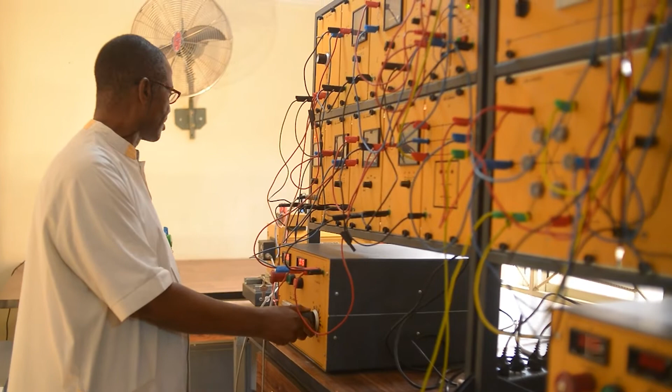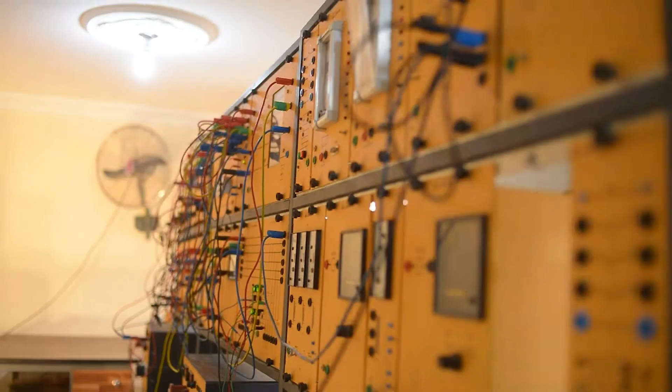At PEEMADI, there is a power simulation laboratory workshop housing a module of a power generating station produced by the institute. Engineer Mohammed Zaki Salihu tells us more. Welcome to the Power Simulation Lab. Here we have a model of a generating station like what we have in Kainji and other generating stations in Nigeria.

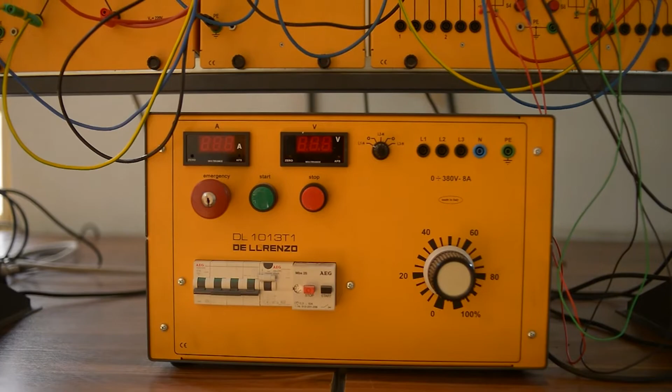In this system, we have a system of bringing two voltages together. For example, if you need higher power and you have only one generating station, but you're able to raise another generator, maybe an independent generator, then you need to synchronize these voltages so that you have adequate power as per requisite.

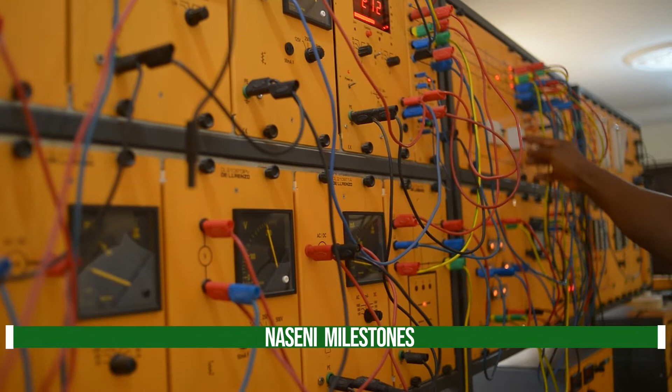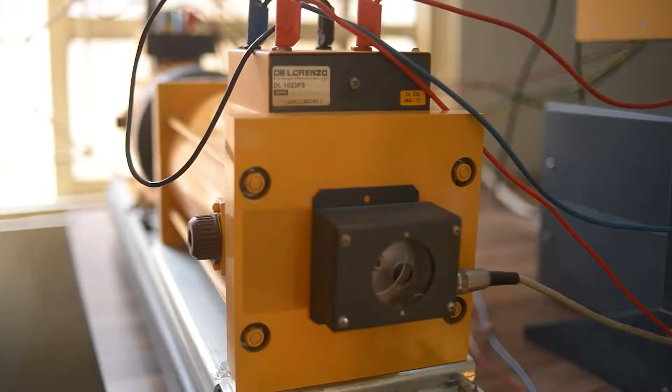Before you do that, you need to make sure your voltages are the same, the phases of the voltages are the same, and the frequency is the same. After you've attained this phenomenon, then you can send your voltage to the bus bar. From the bus bar, it will be transmitted to the utility, where you now have it at your domestic disposal for users. This is a synchronizing machine.

It's trying to bring two generating stations together. At this point, you cannot synchronize them, but you need to allow it to get to a limit where it is going off and on. But if you check the voltage is too high, you have to reduce the voltage to the nominal voltage.

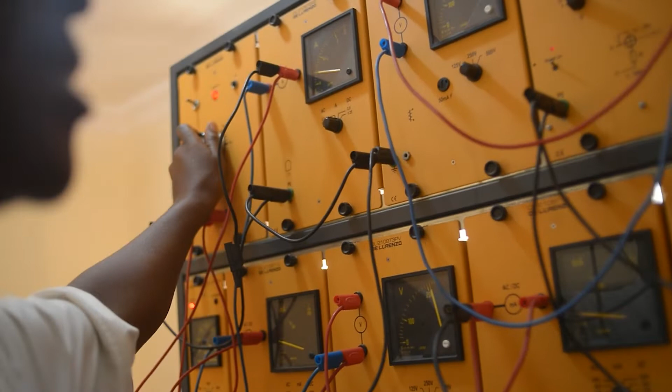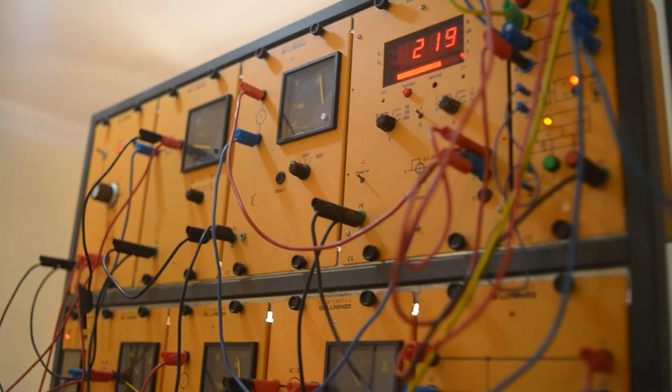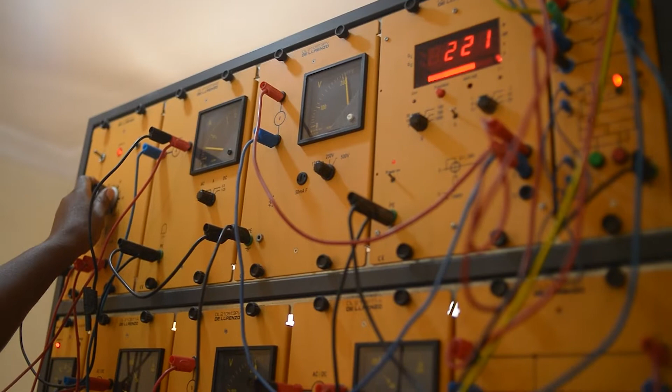Now at this point, we have the nominal voltage, but our synchronizer speed is still too much, so we have to decrease. These are the adjustments being done at the generating station so that there will be no problem by the time the power is sent to the utility.

PEEMADI is known for electric transformer manufacturing. Some of the trained staff in transformer production are hoping to go into full-blown transformer manufacturing when the expected transformer production plant is established. The core mandate of this institute is to produce power equipment so that Nigeria will be self-reliant in terms of power distribution and transmission, and one of the core mandates of that power equipment is the transformer.

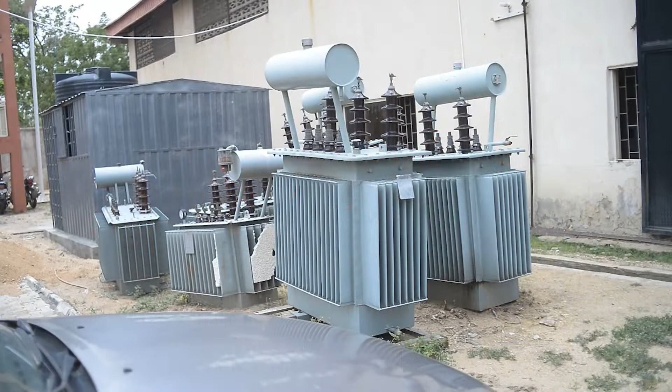We are very versatile in terms of transformers. We have what it takes to produce transformers. We have been trained in China, almost 60 engineers, in the act of manufacturing transformers. Luckily, among those 60 engineers, we have 30 of them in this institute.

While we were in China, we were able to produce almost 9 transformers, which have been deployed to the headquarters now. Right from the design, the lamination, cutting of the assembly, and everything was produced by those 30 engineers. When we returned from China, we now engage in the act of manufacturing transformers based on the basic equipment we have. As you can see there, the engineers are working.

These are the transformers we produced when we returned from China, and we're happy if the transformer manufacturing plant can come into being now. The problem of transformers in Nigeria will no longer be an issue. It's gone forever, because we'll be rolling out a lot of transformers that will solve Nigeria's power problem.

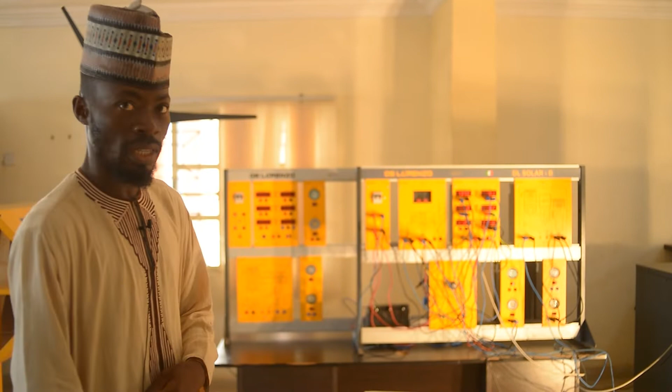This is a renewable energy training section, and Engineer Tajuddin Abdulrahman explains the use of solar and wind renewable energy sources and the staff's capacity in producing such devices. What you are seeing here are renewable energy trainers, the photovoltaic power system, which demonstrates the function and operation of a PV power system. PV means photovoltaic, which means the energy you get from the sun.

What we have here is known as the solar panel. When sunlight falls on this device, the solar panel, it generates what is known as DC voltage. The DC voltage is then converted into AC for domestic use, because most of our domestic appliances run on AC.

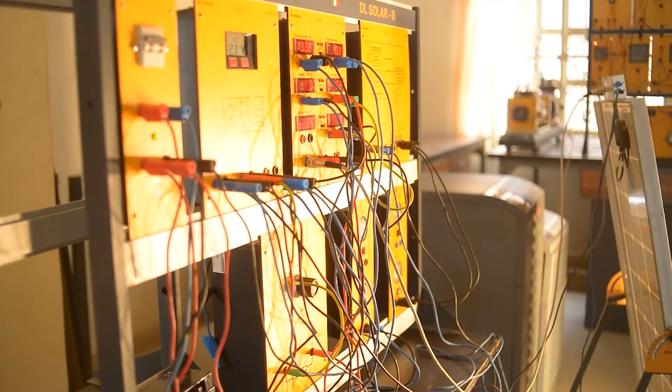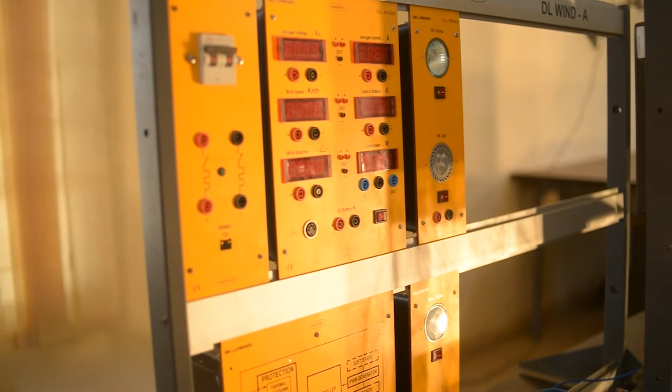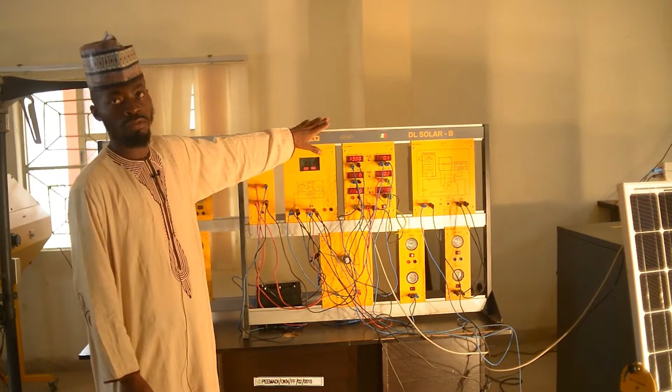Because solar is not available throughout the day, there is a need for us to store the energy gotten in the daytime for use at night. That is what this particular component does, a battery, which is also known as an accumulator. So this is a modular setup of what a solar panel system is all about. Beside it is the wind energy trainer.

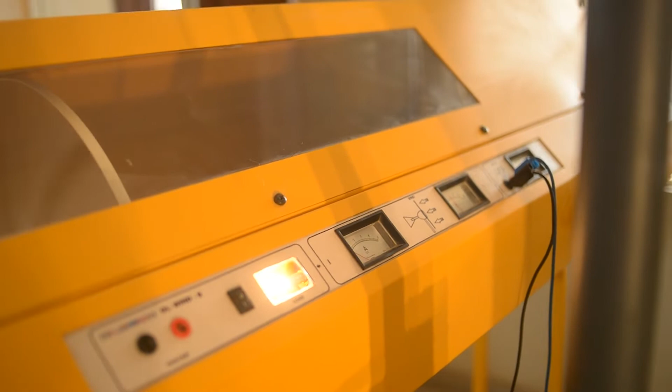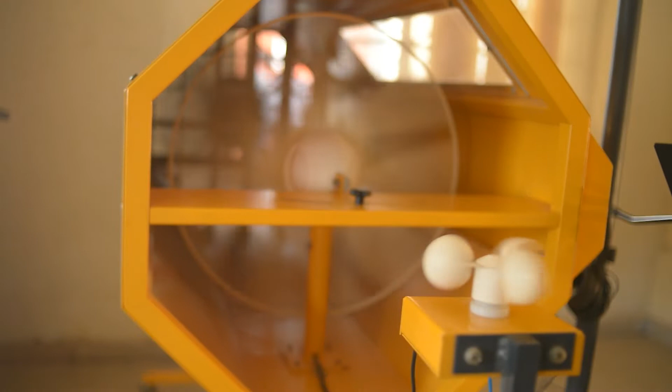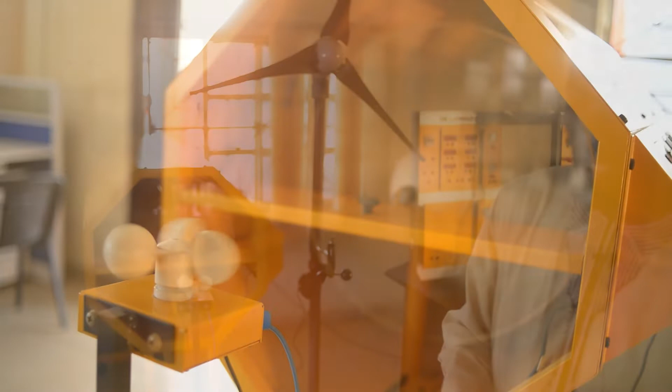It is also a form of renewable energy, which means an energy that can be replenished. There is a fan inside a tunnel which generates the artificial wind. This artificial wind is being converted into wind power with the aid of the turbine inside. This is an anemometer which gives us the value of the wind speed, because the amount of wind energy generated is dependent on the amount of wind speed.

If the wind speed is high, the amount of power will be high. If the wind speed is low, the amount of power that you get from the wind turbine will also be low. So for this outdoor, it is synonymous with what we have here, except that in the case of this outdoor module, you will need a natural wind to blow this turbine to be able to generate power.

When it comes to renewable energy training, we have expertise in that field. Staffs have been trained locally and internationally. Apart from the training, we also look into domestication. So most of these things that you have here, it has been demonstrated, it has been domesticated. We have actually done something like this. In fact, we have made an improvement to what you are seeing here now. Domestically, within us here, we have been able to. So once we acquire any machine, we reverse engineer and we domesticate, which is part of the mandate of NASENI.

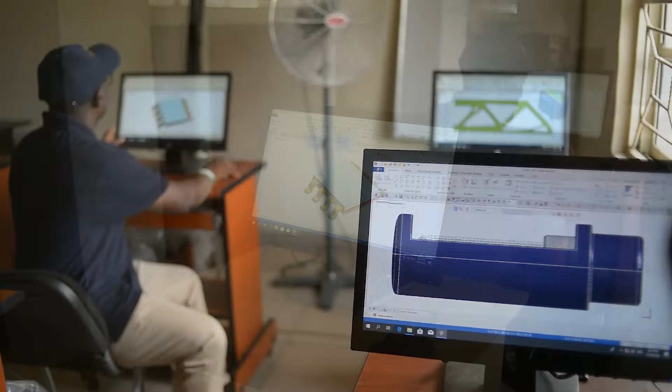Here is the Advanced Manufacturing Technology Laboratory, one of the units under the Research and Development Engineering. Badeyo Oyeyemi is our guide. It is a unit that carries out part of the design work. The drawing aspect of the design is done in this unit before the other aspect of the design is considered. It is a unit that we deal with.

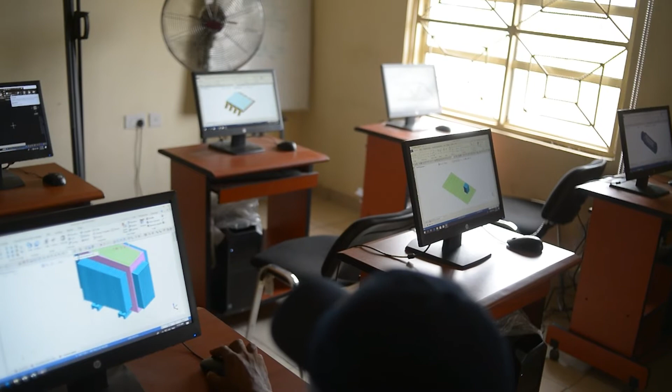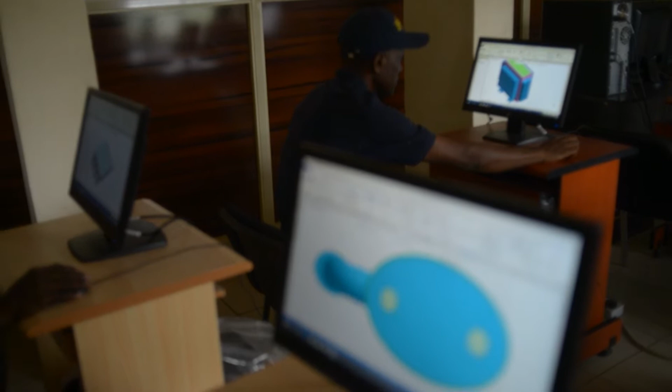We have so many software to carry out our design, which include AutoCAD, the Professional Engineer, which is ProE. We have SolidWorks, and recently we are also trained on the software known as Midas. These are the software we use in this lab to carry out some of our drawings. Some of the products you see around there, we first come here to carry out the drawing aspect of it.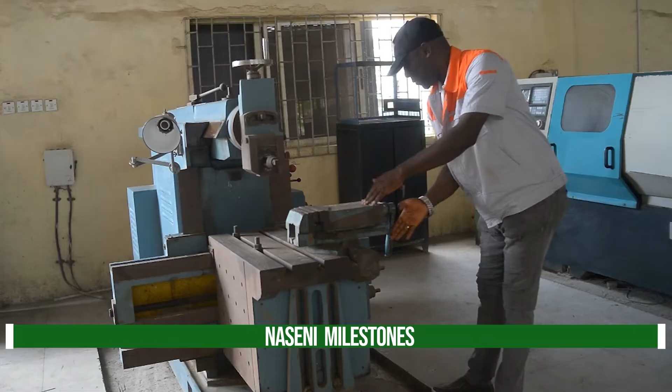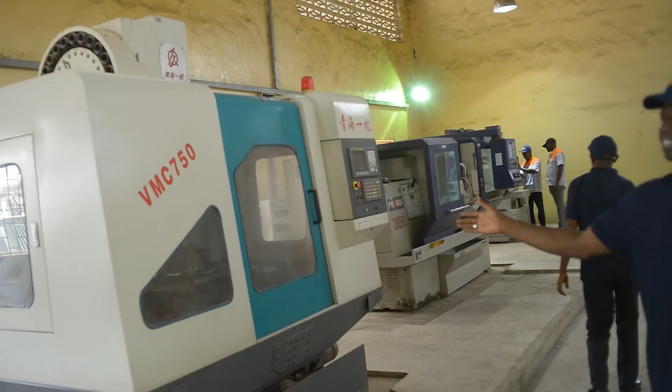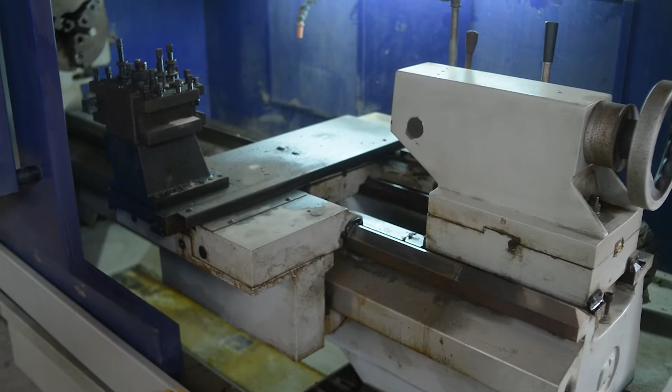Advanced manufacturing is the use of innovative technology to improve products or processes, with relevant technology described as advanced, innovative, or cutting edge. At PEEMADI, there are specific machines for advanced manufacturing technology. They include shaping machines, bent plate, CNC, and other numerically controlled machines. The machines are used in drilling, turning, and facing, and can also be used for mass production of items. The staff of PEEMADI are well trained in the operation of these machines and can produce a variety of items according to specifications.

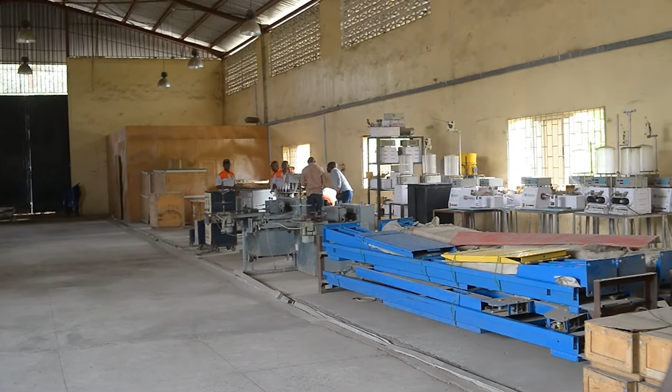We produce 2060 CNC. We use it for turning, for drilling, for facing to do the work. You can see the operation going on. The tool is there, this is the tool post. First we do what is called homing, the homing of the machine to reference the machine. After the referencing, they talk about the spindle. You have to make the spindle work while the tool is there, and you begin to move. You now move the tool post towards the workpiece so that the operation can be carried out. That is how the machine works.

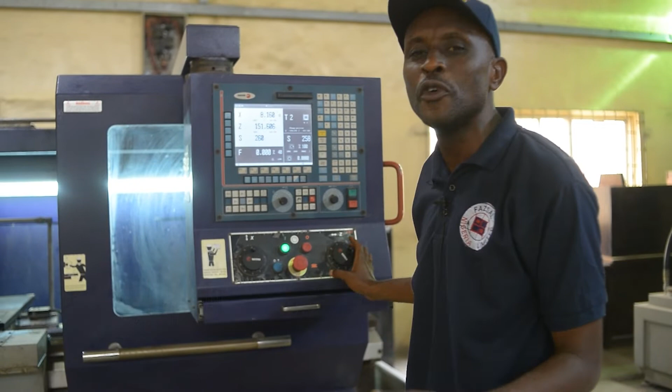It's a very fast means of machining parts compared to the conventional lathe machine, the one we use by hand. So this one is faster, is accurate, its efficiency. In fact, its efficiency is even very close to 80%.

What we have just watched is a clear indication that the competencies of Nigerians in many aspects of homegrown technology is not in doubt. But the challenge is in the adoption of these technologies in order to grow sustainable industrialization for national development. To speak on the imperativeness of PEEMADI in the power sector and efforts by NASENI towards capacity building, here is Professor Mohammed Haruna, Executive Vice Chairman of NASENI.

Power Equipment and Electrical Machinery Development Institute, that is PEEMADI, in Okene, Kogi State, is one of the institutes established by NASENI. The institute was established to cater for the needs of the power sector: important components necessary for a successful power industry, machinery, equipment, switch gears, and even appliances like electric motors, electric generators, transformers. The founding fathers of NASENI have specifically listed intervention in the power sector as part of the mandate of NASENI, and dedicated mono-mandate institutions be created for that purpose.

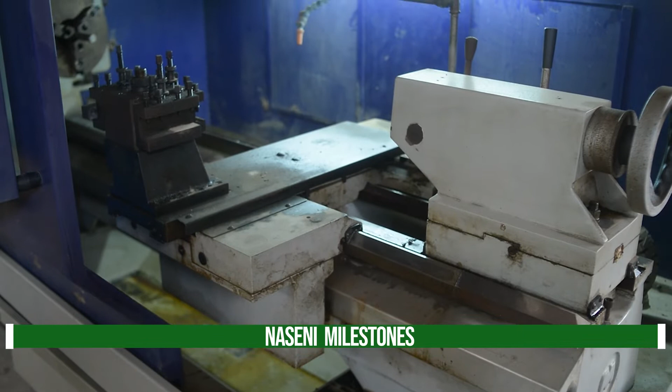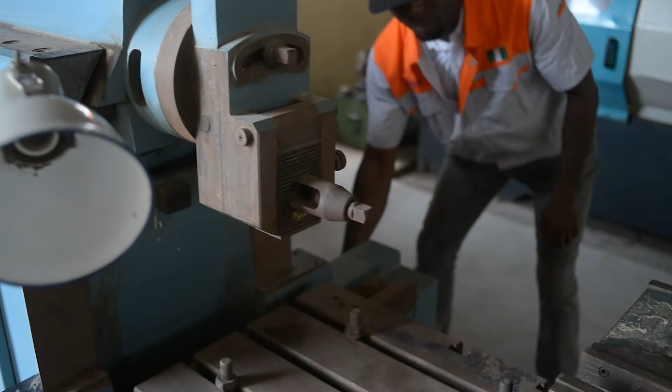So in order to install those CNC machines for NASENI sister institutions, we needed those dedicated transformers. We were given that task suddenly, within 3 months, to come out with repeating transformers, not customized but regular ones that will meet requirements. It is 3-phase, at 415 volts. We were able to do that within a short time.

So anything we wanted to fabricate, we used the Ajaokuta workshop. Despite the non-performance of the factory, we were able to get leasing from the administrators to go there. And within 1 year, thanks to the support we got, we were able to establish a temporary site.

We even acquired a gigantic place as a permanent site, with 47 housing estates inside, road networks, and other workshops, because it used to be the camp and workshop of Dumez, one of the contractors that constructed facilities at Ajaokuta Steel. It is a very befitting and unique location that will cater for all the needs of the power equipment.

And then we got bright young men who were interested, and we sent them to various places across the world in 2010, 2011 up to 2012. We went to Belarus for training, some went to Russia, some to South Africa, some to Indonesia, some to Italy. In fact, 2 different teams went to Italy.

That is where they learned the ability to produce training equipment and solar simulators, making it easier to learn solar technology. The knowledge they acquired there helped us greatly in fast-tracking the completion of our first solar panel in Karshi, and served as the foundation building block for subsequent training.

We are giving people training in the area of solar installation, repairs and maintenance, and even development of equipment such as solar generators and the customized unique inverters made by NASENI.

It is the blueprint I developed from PIMADI to do transformers, high voltage, and solar cells that I offered to my boss, Professor Adeoye of blessed memory, who bought the idea and loved it, but there were no resources. So when God in his ultimate mercy appointed me to this position, I continued pursuing that, not knowing where I would get resources across the world.

And today this vision has become a reality with the approval of the government of President Muhammadu Buhari.

Next, to speak on PIMADI's giant strides in transformer development and production of a high voltage laboratory for testing of power equipment is the Managing Director of PIMADI, Engineer Adaja.

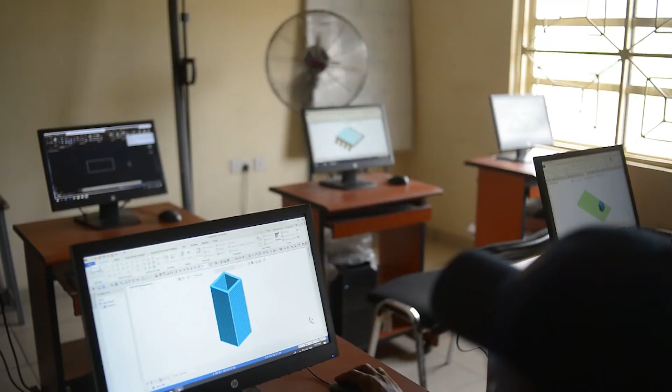Actually, we research into new products. Apart from researching into a new product, we carry out reverse engineering of existing equipment, then reproduce it, and introduce some new ideas into them to perform better than the original.

PIMADI is set to impact more on the power sector of the country. Especially, we are developing a transformer. Hardly will you see any company in Nigeria building a transformer—most transformer companies only do assembly. Our own goal is to build transformers from scratch and make them available in Nigeria.

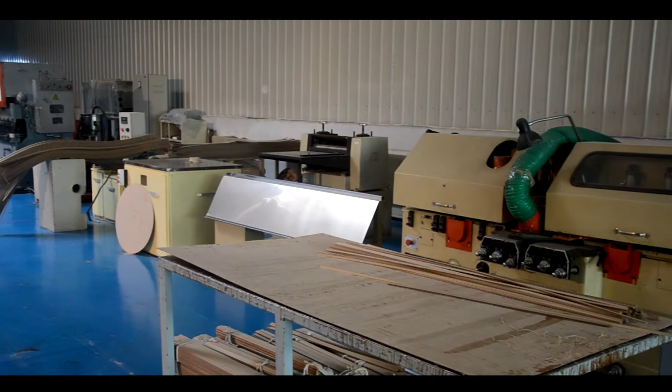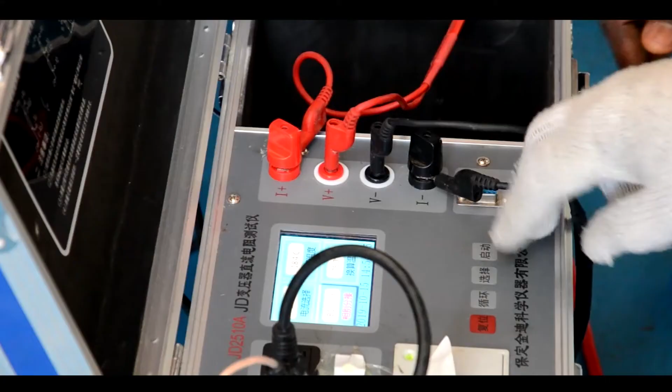We are also setting up our high voltage laboratory, where most of the power equipment we have in this country can be tested to know whether it satisfies the requirements for use in our power system. Once you have stable power in the country, you have created an enabling environment for every other industry.

Our own role is to support the power sector and produce the necessary equipment they need. And once power is stable, every other sector will come up.

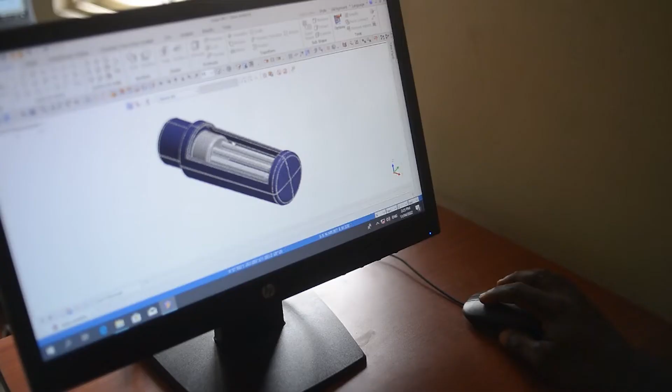We have some smaller devices we've been developing here, like a load isolator device, which helps in management of the power system. But the main equipment we want to produce now is the transformer, and the transformer line will soon be put in place.

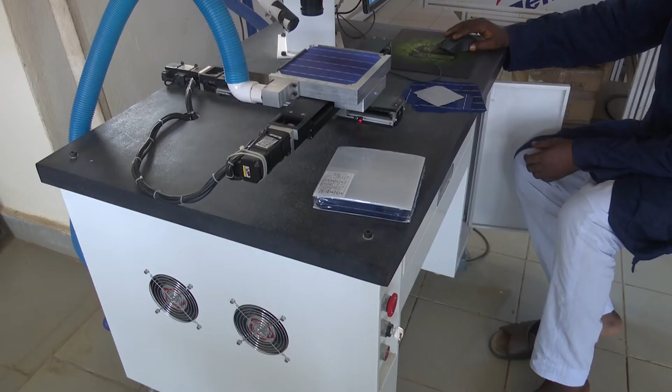Really, all the NASENI institutes work hand in hand. For example, the last solar training kit we produced, we went to Enugu and used their machines to produce those items. Sometimes we carry out solar installations, and we'll go as far as Karshi, our center there, to acquire our solar panels.

The system in NASENI is that we ask within ourselves before looking outside for what we don't have in PIMADI.